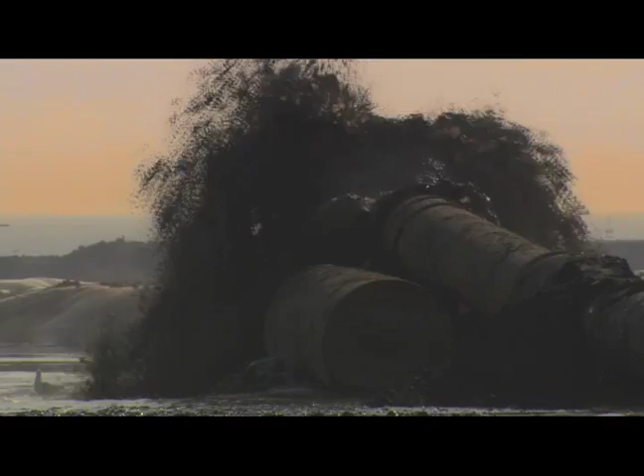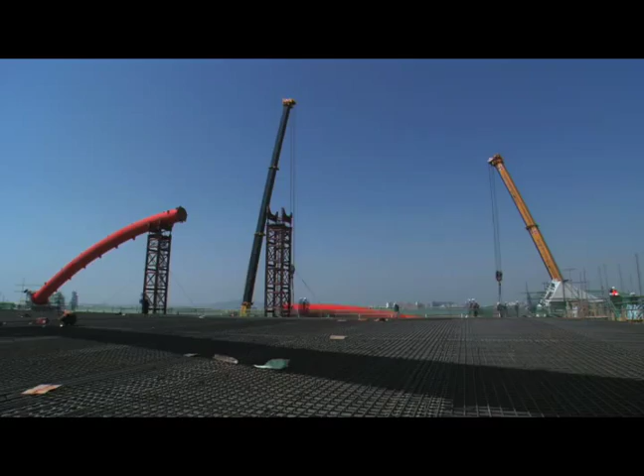It was a tremendous challenge. The construction of an expressway longer than 18 kilometers in length, traversing vast, barren waters. With a large tidal difference of more than 9 meters and uncompromising violent winds, there would be no room for error for this new cutting-edge technology.

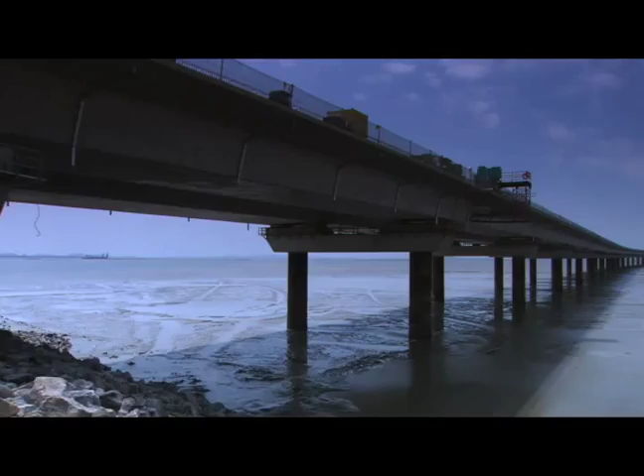It was a miraculous challenge created by a dauntless will, allowing Korea to shine and opening a new window for the hub of Northeast Asia in the 21st century. The state-of-the-art gateway, Incheon Bridge, integrating the land, air, and sea. A new chapter in history has now begun.

Total length, 18.4 kilometers. Height of the main tower, 238 meters. Total cost, 2.4 trillion won. Construction period, 4 years and 4 months. Utilizing 2 million man-days. A world-renowned long-span bridge project, Incheon Bridge.

Linking Incheon International Airport on Yeongjong Island with New Songdo City. Incheon Bridge's main section has a cable-stayed structure and encompasses both the marine sector and the ground sector.

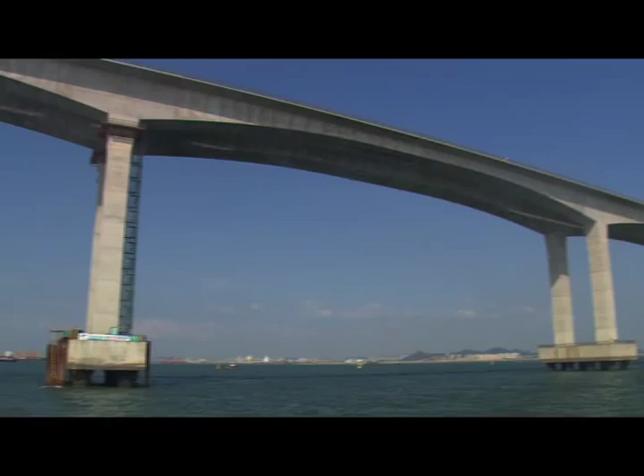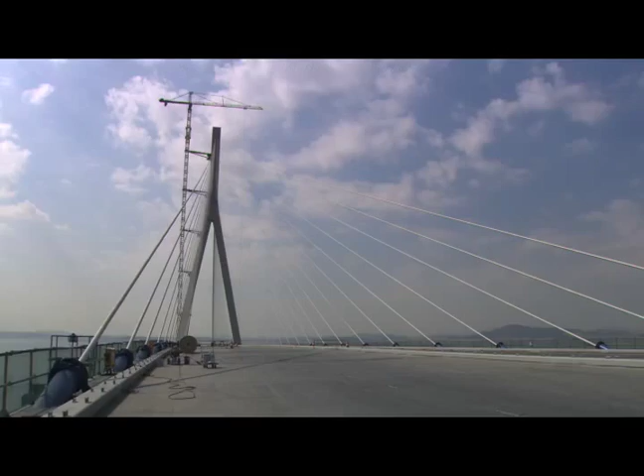The 1.48 kilometer long cable-stayed section, which represents the Incheon Bridge, has a main span reaching 800 meters, the 5th longest in the world at the time of completion. With the main tower reaching 238 meters high, it is similar to the 63 Building in Seoul.

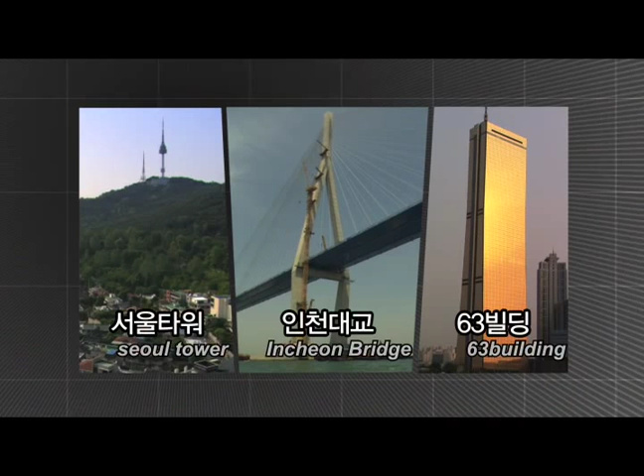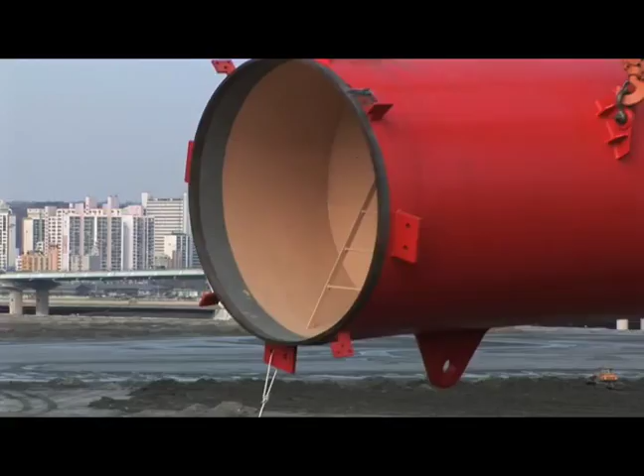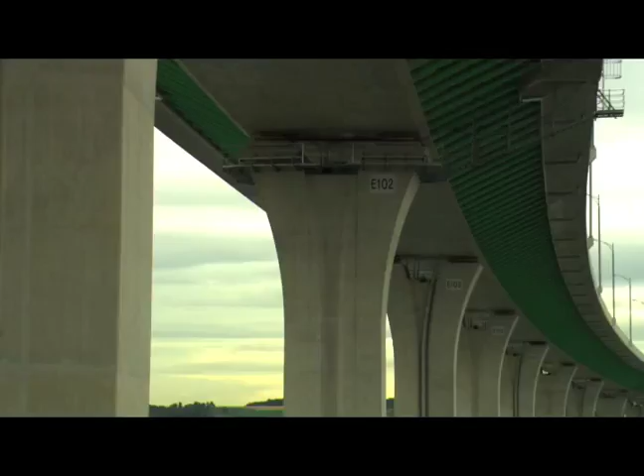The bridge sections on land were aesthetically and technically built using the latest construction method, making it a diverse bridge. The hybrid half-through arch bridge was configured to have a futuristic appeal. The pre-stressed concrete box girder bridge with FRP struts has simpler spans and piers.

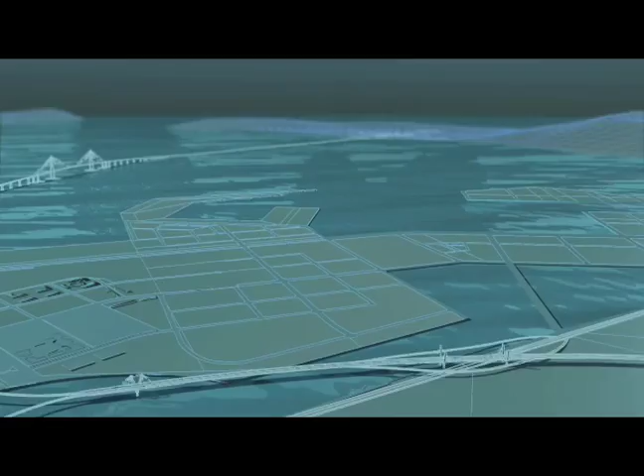The butterfly-shaped cable-stayed bridge symbolizes New Songdo City. The extradosed bridge focuses on symmetry and scenery. All these constitute a diverse Incheon Bridge, which has a combination of technology and aesthetics, and is easily an exhibition of a state-of-the-art bridge.

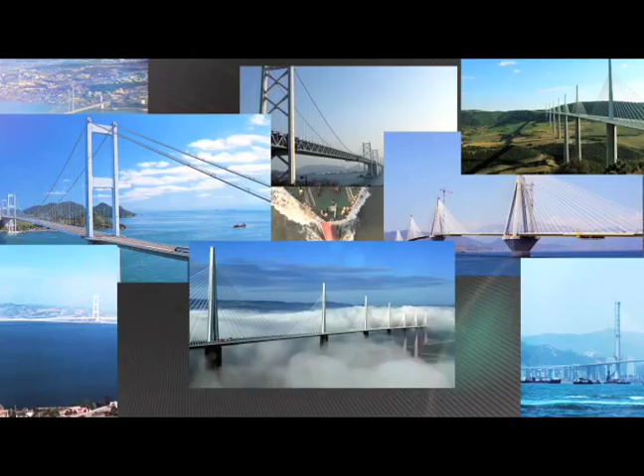In today's world of skyscrapers and vast bridges, the country entered into a life-or-death competition with this large-scale construction project. In particular, the construction of this long-span bridge, with its high technology and great value-added innovation, is anticipated to lead the next generation towards the status of a developed country.

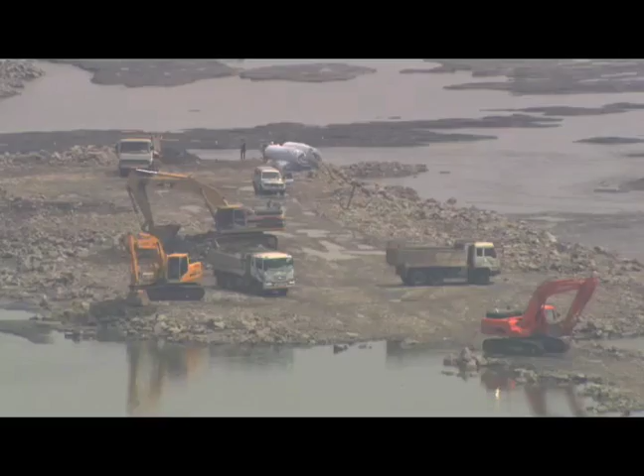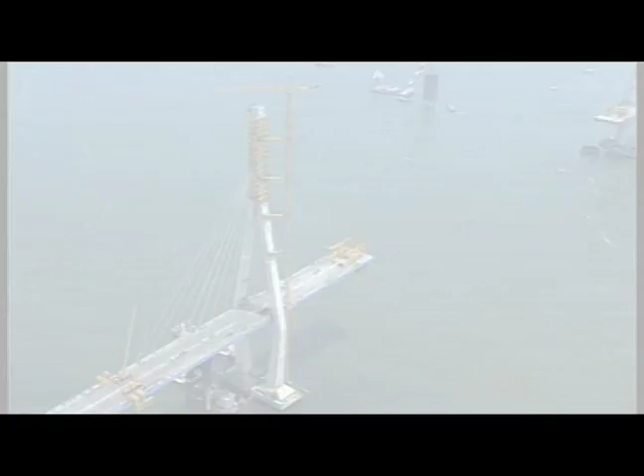In 2005, Korea entered into construction of the Incheon Bridge. And the bridge received great attention from bridge specialists as well as notable people around the world. At the time, construction of long-span bridges was limited to only a number of advanced countries.

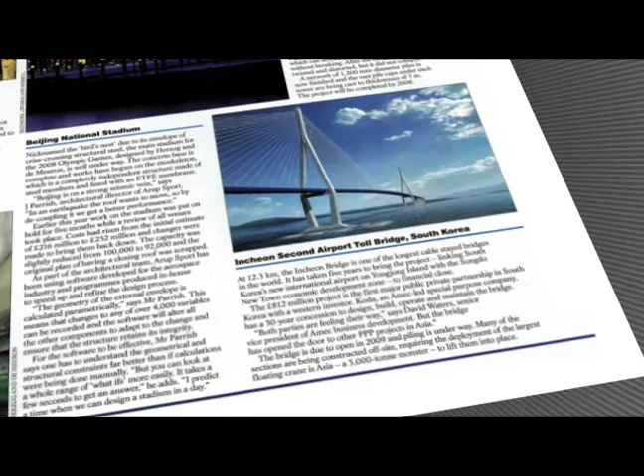In 2005, a British construction magazine selected the dynamic bridge to be one of the 10 wonders of the construction world. That same year, the financial magazine Euromoney presented it with the PF Award for the best traffic infrastructure in the Asia-Pacific area. Then in 2007, the construction magazine ENR named it one of the top newsmakers. Its state-of-the-art technology was known to the world.

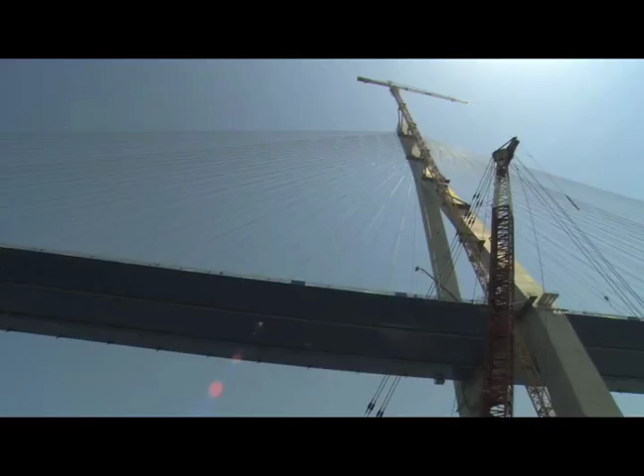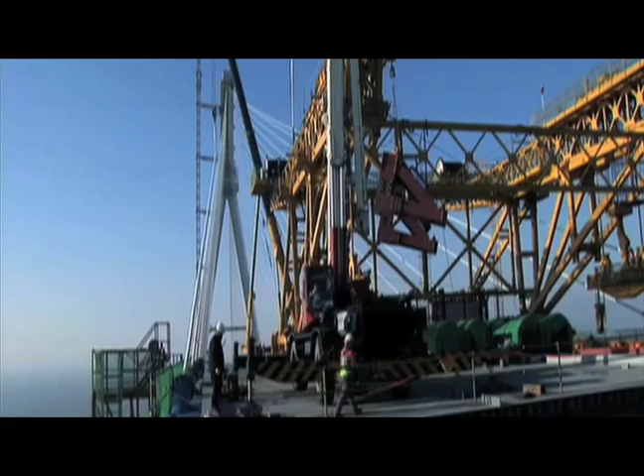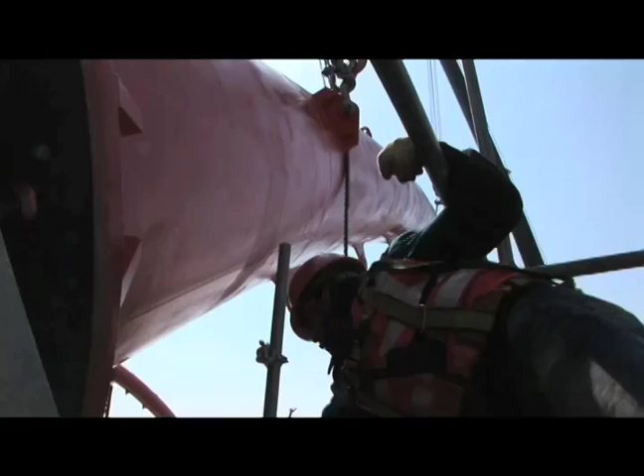The successful construction of Incheon Bridge was due to a quick and safe vanguard method of construction. A combination of the fervent passion of the engineers, along with Korea's extensive experience and skills in construction, and the active support from the government, made this possible. Incheon Bridge was built by experimenting with a different method rather than using the existing methods of construction.

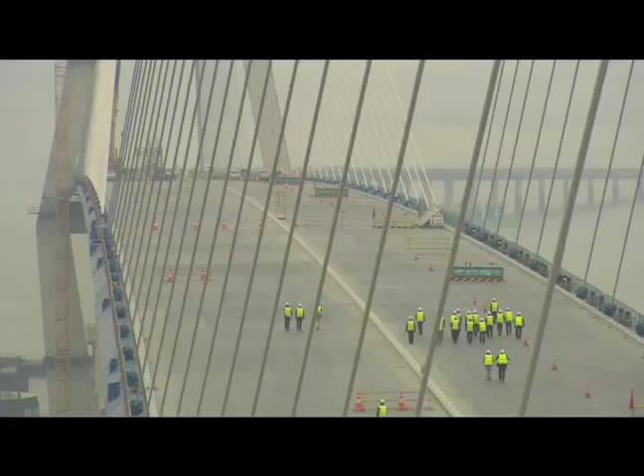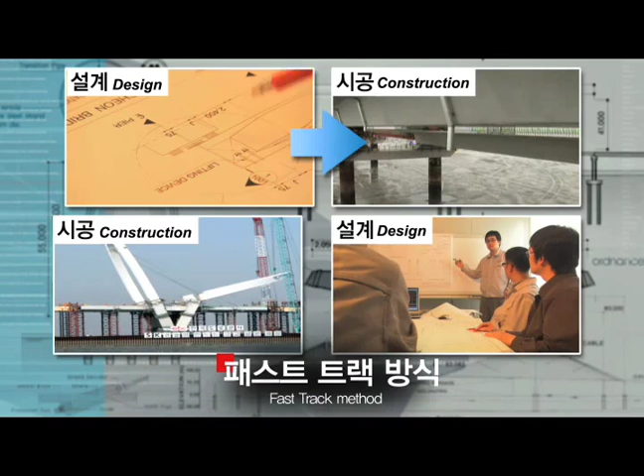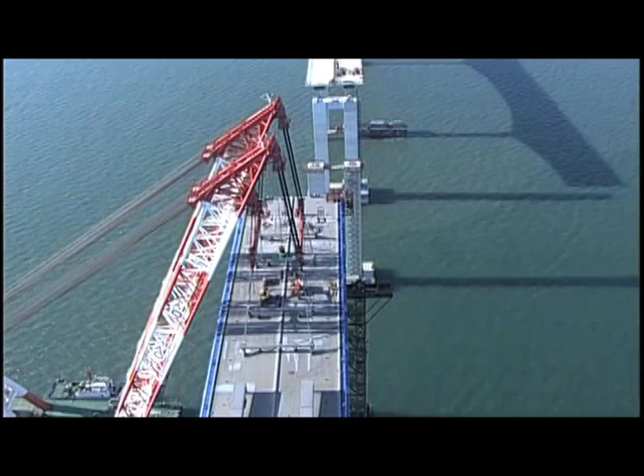First, the fast-track method was utilized. The conventional method consisted of first completing the design followed by construction. Breaking from this, design and construction were carried out simultaneously. While this breakthrough reduced the total construction time, it also had the advantage of utilizing the latest method and applying it to the design. Even the bridge's foundation is different from other bridges.

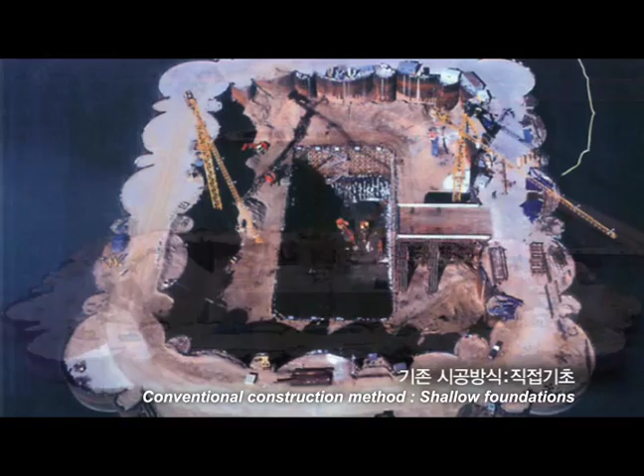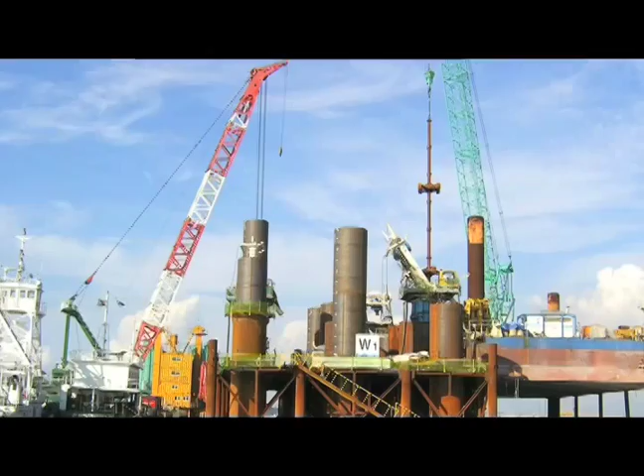When erecting the foundation for a cable-stayed bridge, the area is usually blocked off, extracting the water out before beginning to build. However, the Incheon Bridge was built using large diameter drilled shafts to secure the foundation at the bottom of the sea. In order to ensure the safety of this method, the foundation underwent a loading test using 30,000 tons of weight.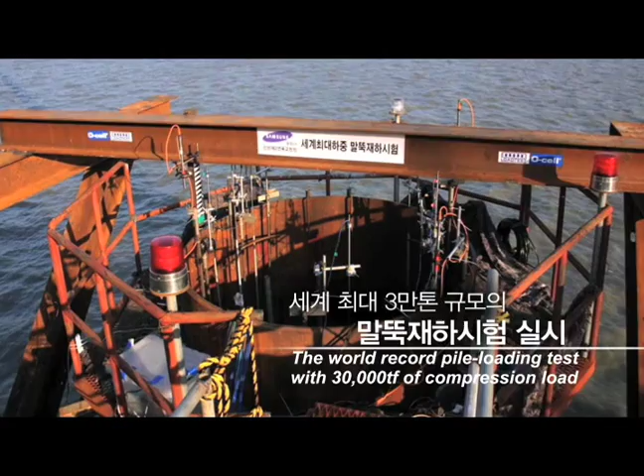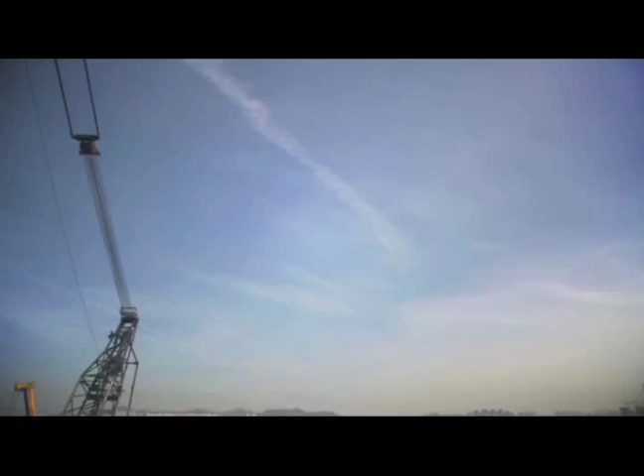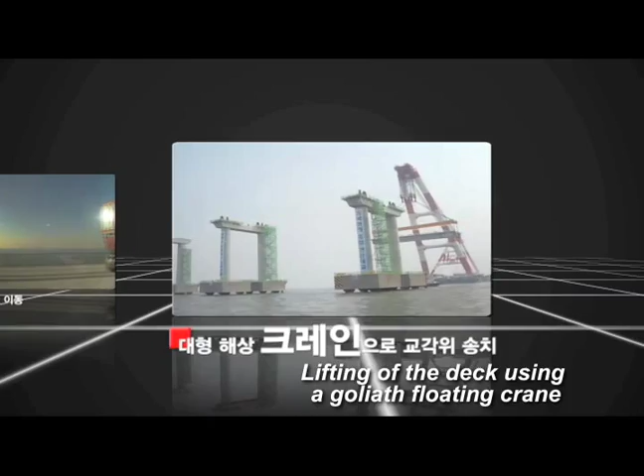This is the same weight as having 77 Boeing 747s taking off simultaneously. Even for constructing the spans of the bridge, a high-technology method of construction emerged for the first time in the country. In the FSLM method, 50-meter-long decks were initially precast off-site, and after being transported, a Goliath floating crane was used to load it onto a specially designed large carrier to complete the transport. A process which took 30 days with the conventional method was completed in only 3 days.

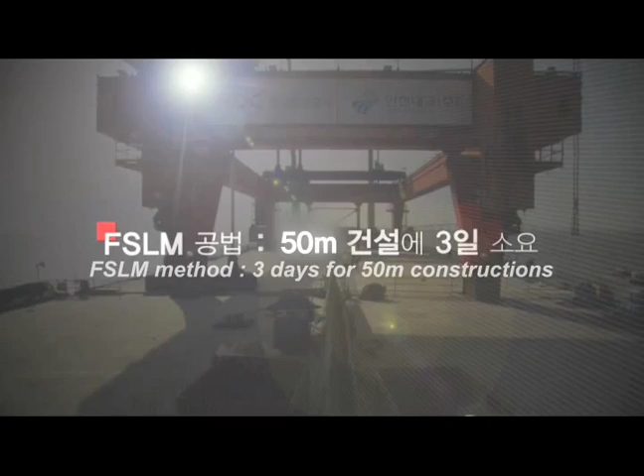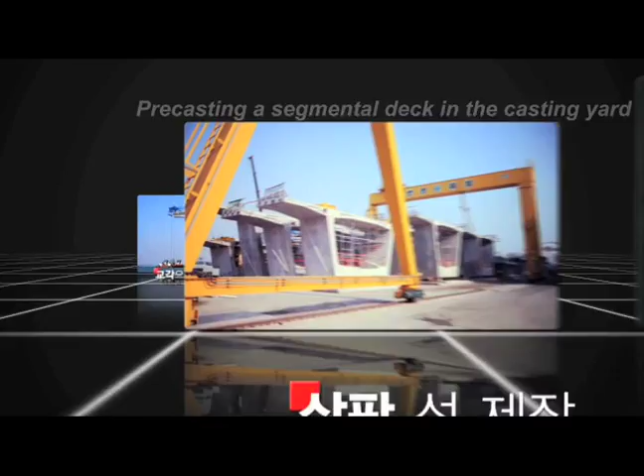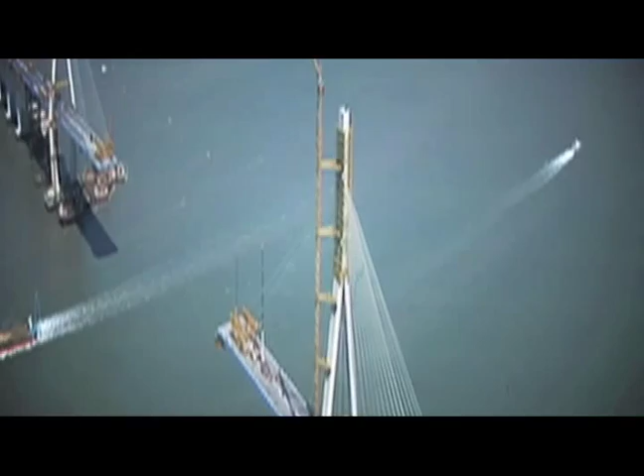The PFCM method was used to connect the approach sections to the cable-stayed section, and by using a derrick crane, the precast decks were counterbalanced. This method accurately estimates the bridge's shape, and the difficulties in creating the spans were a skill in itself. In addition, automated rebar cage fabrication was utilized for the nation's first large-scale pile. And in order to ensure precision and safety for the main tower, an auto-climbing system form was utilized to reduce construction time as well as any errors.

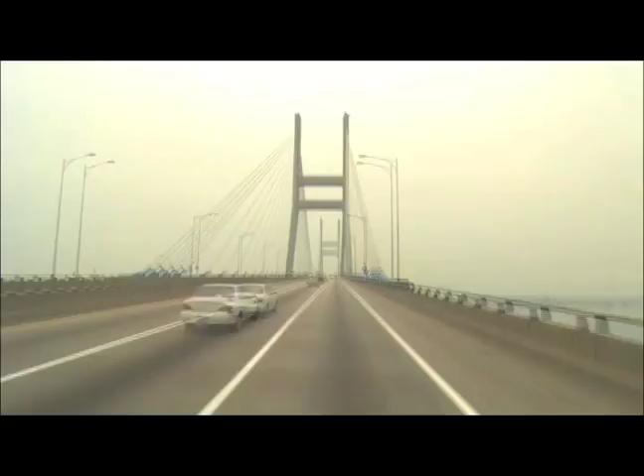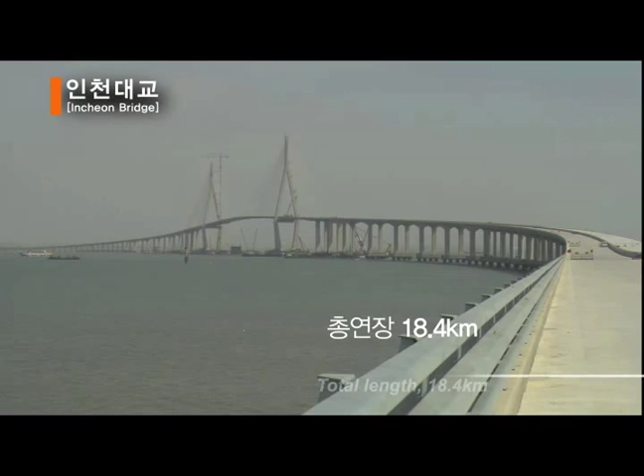Connecting Pyeongtaek Gyeonggi-do and Dangjin Chungnam, the 7.3-kilometer-long Seohae Bridge took 7 years to complete. In comparison, the 18.4-kilometer-long Incheon Bridge is nearly 3 times longer with more advanced technology. It took only 4 years and 4 months to complete, showing astonishing results in the reduction of construction time. This is 4 times faster in comparison to the Seohae Bridge.

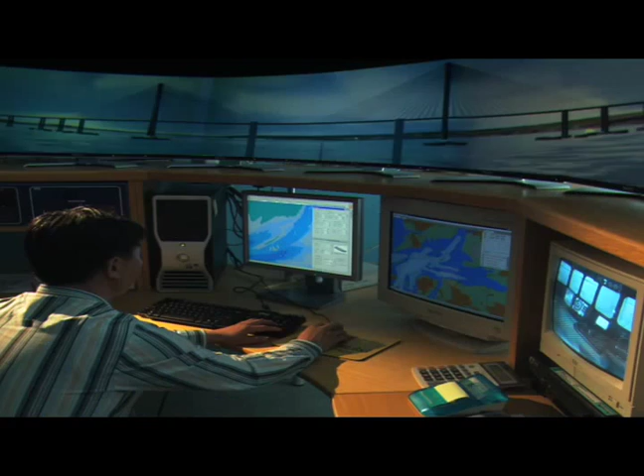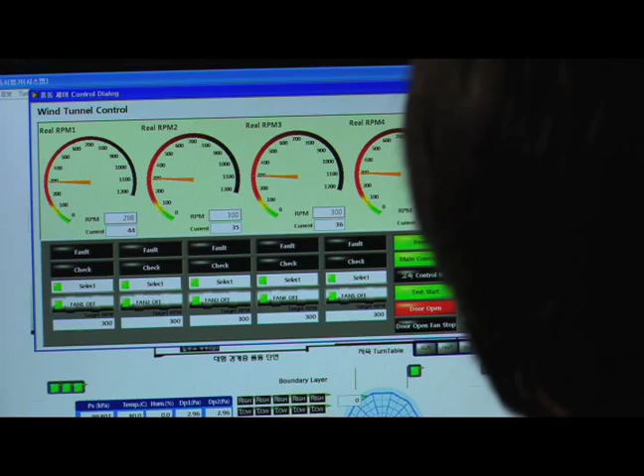The Incheon Bridge was not only built with high technology, but in order to ensure the safety of the bridge, it underwent a series of advanced experiments and analysis processes. Being above the water leaves the Incheon Bridge vulnerable to strong winds. To overcome this, it withstood a critical velocity of 72 meters per second of powerful winds through the wind load tests, as well as an earthquake intensity of 7, showing its durability.

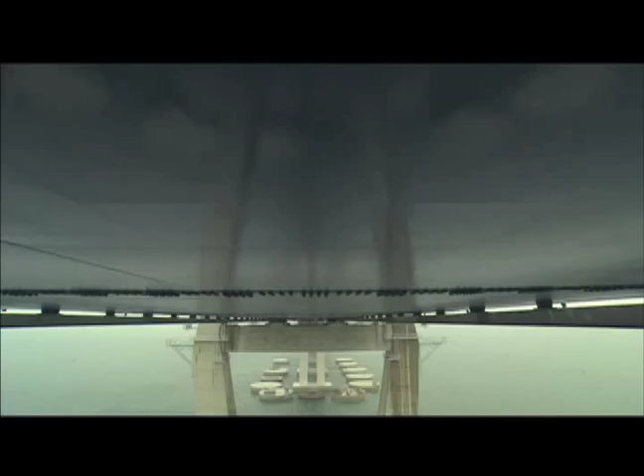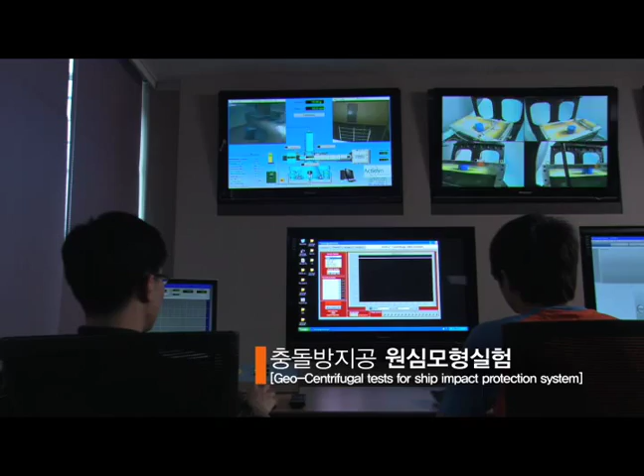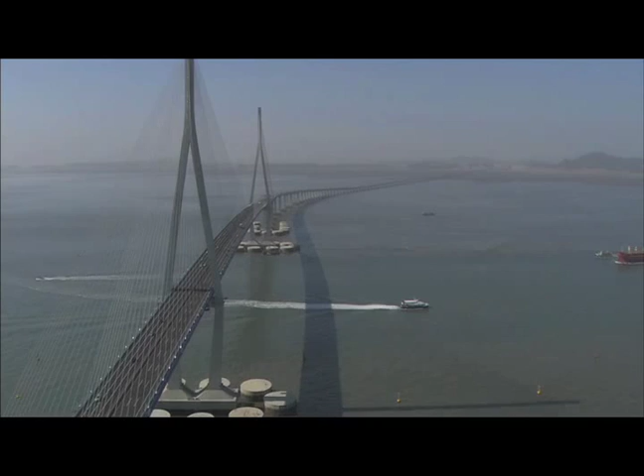In addition, at the time of completion, a dolphin-shaped ship impact protection system was created on a global scale near the bridge to ensure absolute bridge and vessel protection. The ship impact facility underwent over 70,000 high-tech simulations, and even with a head-on collision with a 100,000-ton vessel, the bridge was designed to ensure the safety of both the bridge and the vessel. As a result, the Incheon Bridge, along with its marvelous high technology and the highest level of safety, is being rated the latest workmanship in civil engineering technology.

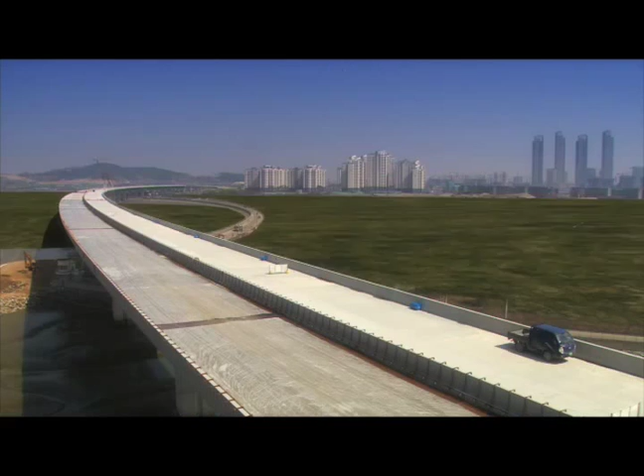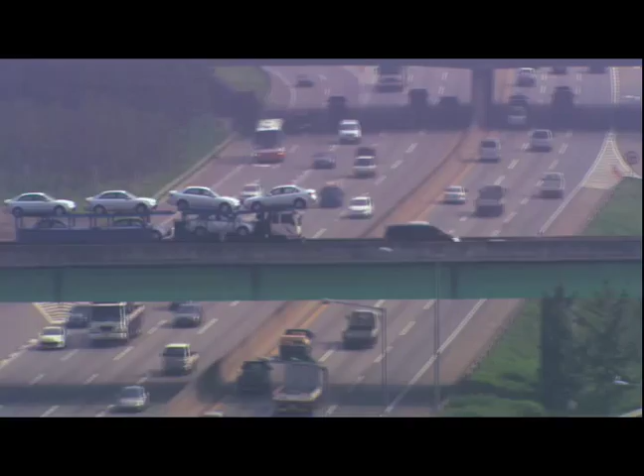The state-of-the-art Incheon Bridge is receiving attention as the core of the Incheon Free Economic Zone and the hub of Northeast Asia in the 21st century. Connecting to the 2nd and 3rd Gyeongin expressways, Incheon Bridge has improved the traffic flow for southern Seoul and the greater metropolitan area, along with a 40-minute reduction in traffic time from Songdo to Incheon International Airport, resulting in annual savings of 480 billion won in logistics costs.

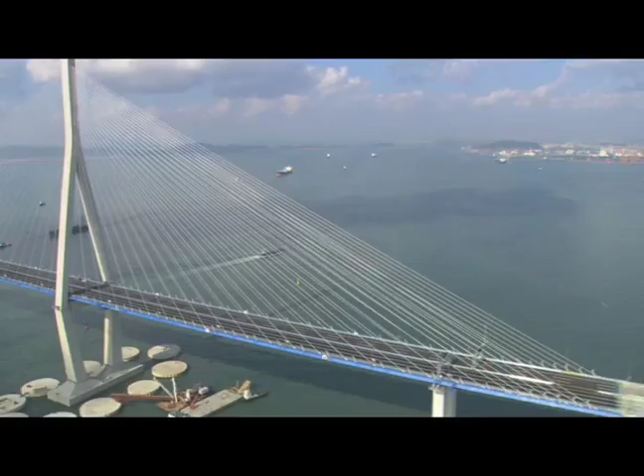5 million pine trees have been planted, which will reduce 50,000 tons of carbon dioxide and pollutants yearly, and aims to greatly contribute to Korea's green growth. In addition, the bridge leaves a lasting impression on the various foreigners who travel through Incheon Airport and Incheon Port by symbolizing Korea's state-of-the-art technology. During the past 40 years, the tireless efforts of the Korea Expressway Corporation have focused on creating a bright future for Korea.

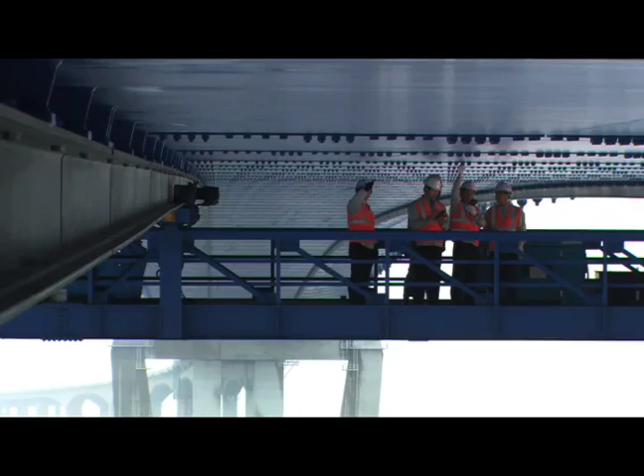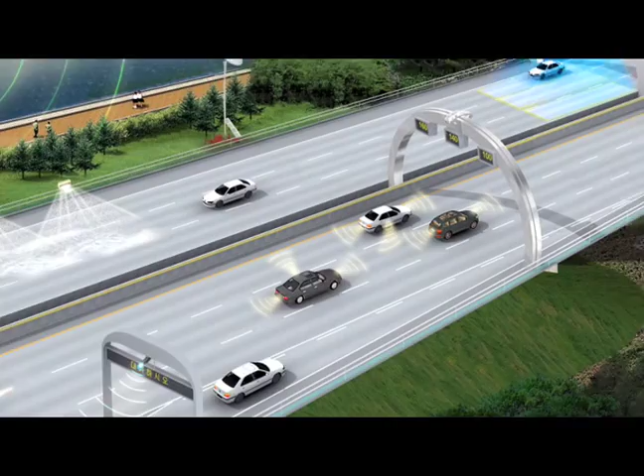Beginning with the construction of the Gyeongbu Expressway, which represents Korea's economic development, the Korea Expressway Corporation has opened the door for the next generation with its 3,000-kilometer expressway, and is using the experience and skills obtained through the successful construction of the Incheon Bridge as a backdrop to create a new history for Korea's bridges and expressways. Through research on long-span bridges and on ways to accelerate construction, along with striving to create a smart highway system, utmost efforts are being exerted to open an abundant future for Korea.

By uniting the land and the sea together with the heavens, and by creating a new world, the marvelous Incheon Bridge. The Incheon Bridge is connecting Korea to the world through its grandeur and opening a new window of hope for the next generation.